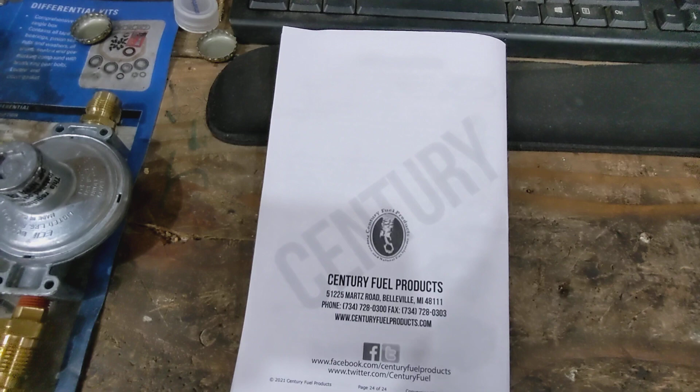Today I'm finally getting around to putting this propane conversion on my Coleman. Is it a Coleman? I don't know what it is. It's a generator, 5,000 watt. I'm tired of running gas. Out here in Western Washington, we lose power quite frequently, and gas is just something that's unreliable. You know, you can't store it like you can propane. You got to put additives in it. It loses its volatility. Propane sits in a bottle and there it lives.

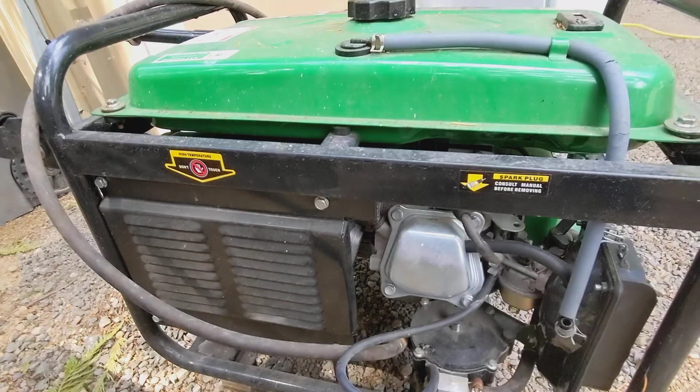So there's a couple different variations of this. Like this one, for example, I've been using this for a couple years to run various things in the house, refrigerator, stuff like that when the power's out. Now this is one of these hybrid elite 4,850 watts. Yeah, that's total bull. It's just not capable of producing that much power, and in all reality, it can barely even run two refrigerators at the same time.

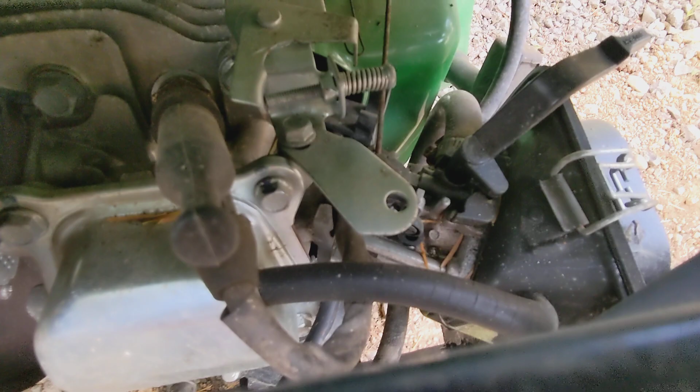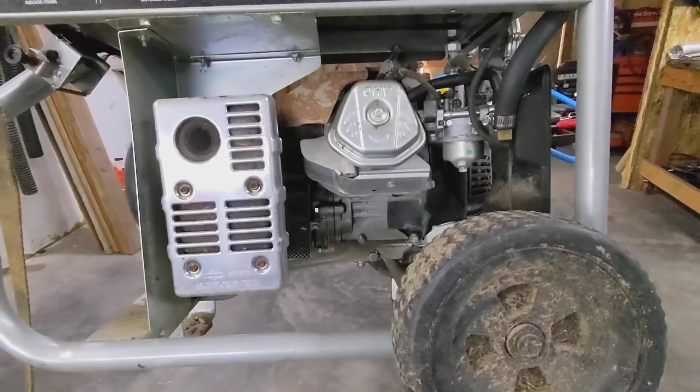So these have a regulator. These ones are sensitive to vacuum, so it's kind of like a vacuum secondary on a carburetor, where the more it sucks in, the more it deals with this diaphragm. The one we're going to install is a little bit different. Now, this carburetor is special. It's for this type of application. It's not for a conversion. If we look down in here, you can see that the propane line comes in the side of the carb, and this also has a fuel line that goes in somewhere in there. So this carburetor is specifically designed to run propane or gas. These carburetors are specifically designed to run gas. They don't have the ability to run propane.

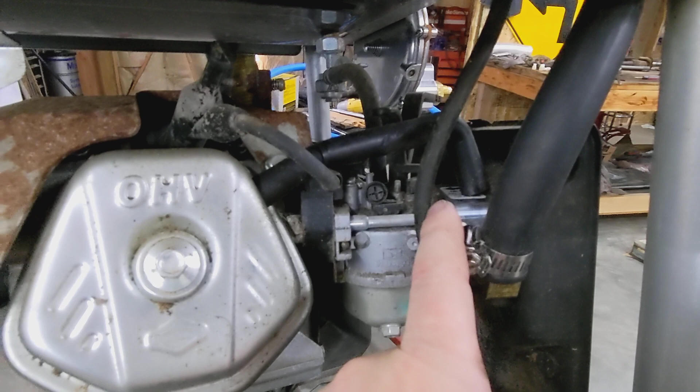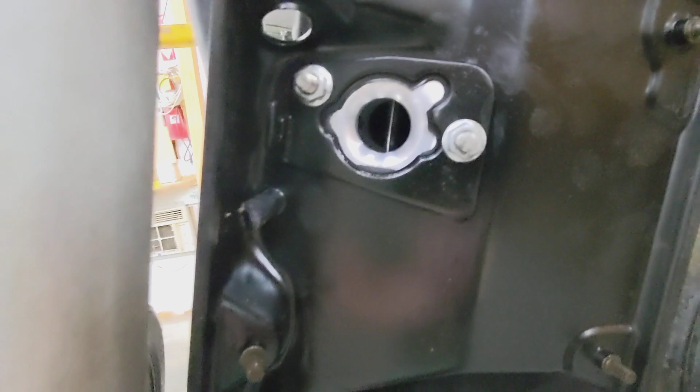So in the conversion, you get this little venturi block that sits on here. It's really straightforward. You don't need me to explain or show you how to do it. Take the air filter off, put the extenders on, put the adapter on, and then figure out which way you want your hose to go. That's it. You put it back together. So this has a secondary venturi. Now, carburetors already have a venturi in there, and if we look inside there, we can see our choke flapper.

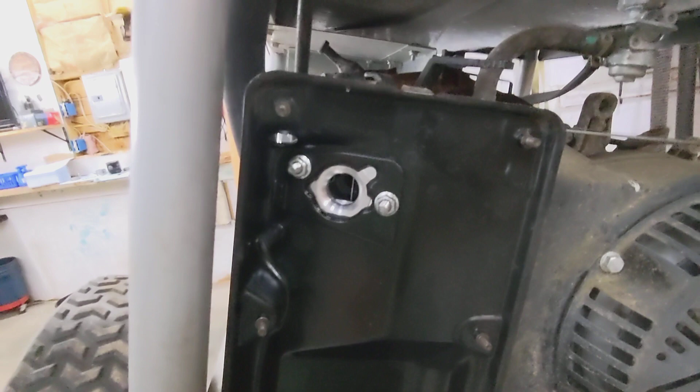So gas and propane have different volatilities, different energy densities, and stuff like that. You'll get a lot of people who will convert their generators like this, and then they'll complain that they don't run right. And that is because the venturi for the gas and the secondary venturi create a low pressure spot that sucks the fuel in. This secondary venturi is smaller, so it creates a low pressure zone in front of the carburetor, so it doesn't suck in the fuel and it doesn't run right. So if you did one of these conversions and it doesn't run right, that's why.

You can't run back and forth. You have to take the adapter off if you want to switch back to gas. That's just how it is. Sorry if you experienced that. You should have done more research to begin with, but that's just how it is. These are not dual fuel carburetors. So with that being said, we have our block here. We have our fuel line, which then comes up to the regulator.

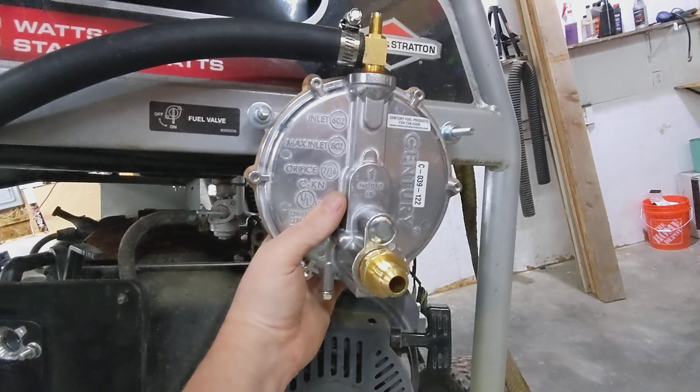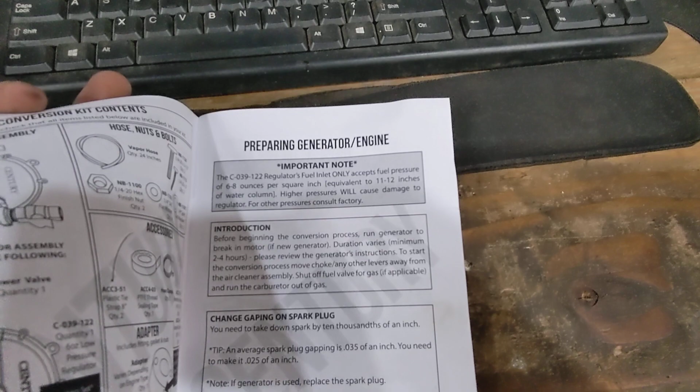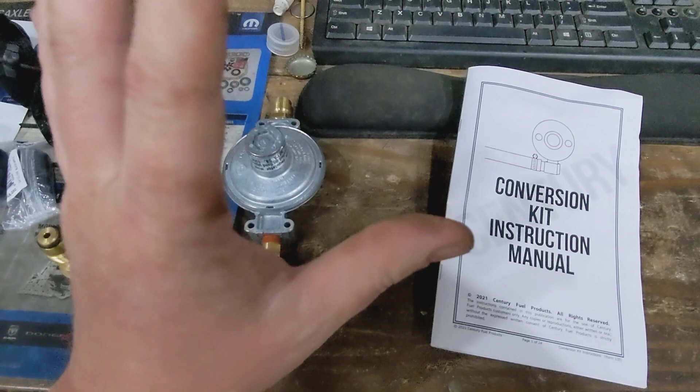Now, in some situations, if you're just running a barbecue tank, you can sort of get away with that. But these systems are extremely low pressure, so it can actually damage that regulator diaphragm if the input pressure is too high. So you always want to run a standardized regulator off of your tank, because it's only a couple of dollars more, and you might as well do it for longevity. There's nothing worse than being 10 degrees out, 3 feet of snow on the ground, and you blew out your regulator because you're cheap.

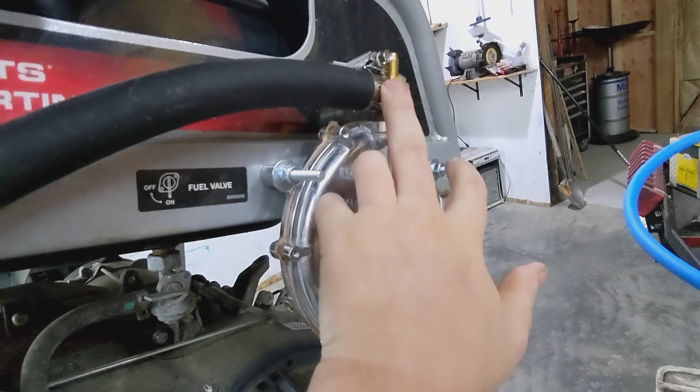So how this works is your propane comes in here, goes through the diaphragm, and then out here. There's also a bleeder on the back. The first time you turn the gas on, you want to hit this bleeder to allow some fuel to travel down the hose into the carburetor. Now this up here is what they call a power valve. It's essentially a needle and a seat, sort of like a carburetor used to have, where this sets the amount of fuel that comes out.

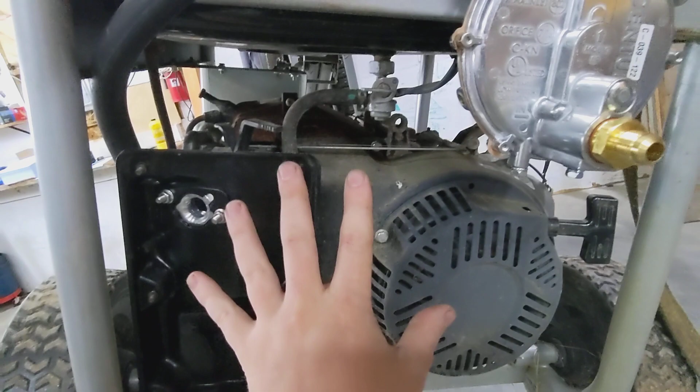See, these are a fixed output. Since your generator has a governor in it that controls the throttle, it wants to run at a constant RPM. It doesn't vary. So this fuel output is constant. This is something that you'll have to adjust later. They kind of come preset from the factory to get the thing running. But you loosen up this screw, turn it in till it wants to die, back it out till it wants to die, and then find a happy medium. More on the leaner side would probably be more economical fuel-wise, but it's pretty simple.

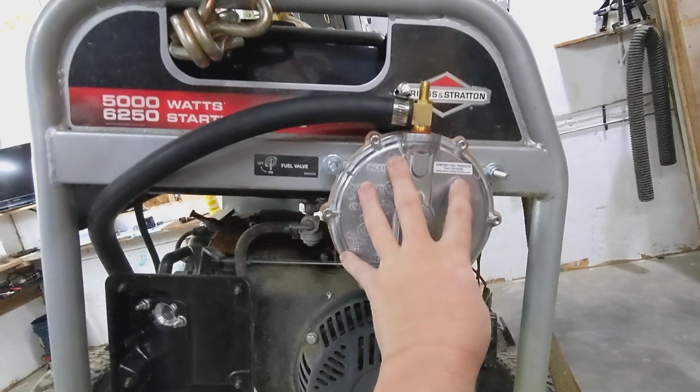So you basically just drill some holes in it, mount it up, and now it's part of the deal. Now I put mine right here just because of the way that my generator setup is. It's kind of hard to get in there.

What are you doing, Willow?

So the kit comes with pretty much everything you need and a couple extra pieces depending on how you want to get your system set up. It comes with a straight fitting and a 90 here. It also comes with some fittings and a 90 here and a shutoff valve. So that all depends on your specific application where you want to put your stuff.

What is that birdie doing over there? He's trying to take an air bath. This is why I can't ever get anything done in the shop.

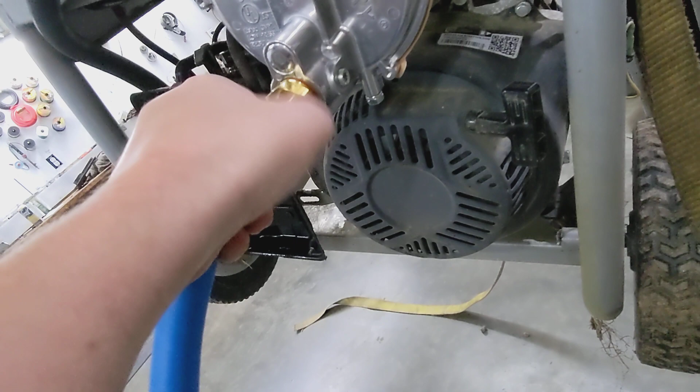All right, so once you get all this set up, it comes with a fuel hose. This fuel hose connects from here. And let's see if we can drop it on the ground. Pretty simple. Just screw it on. Okay, now this end is going to go to the first stage regulator.

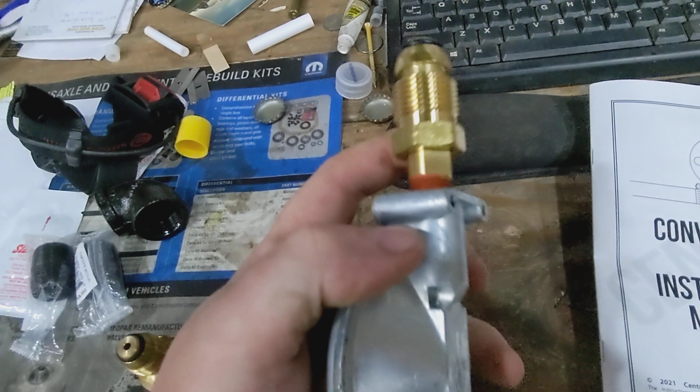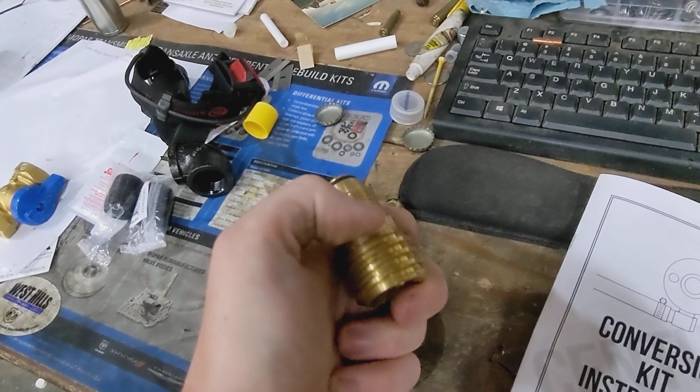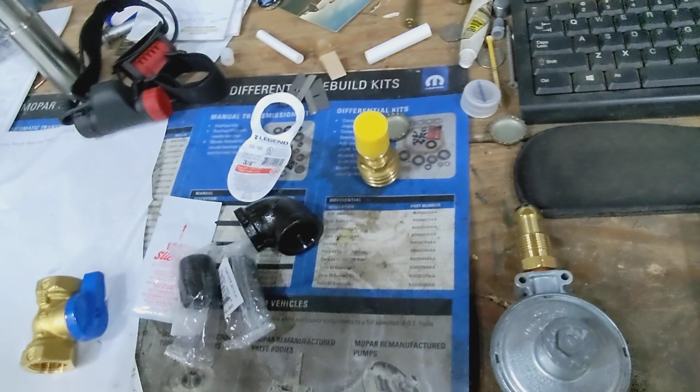Now this has a POL fitting for it. This is standard for all propane tanks. You know, even your barbecue cylinders will have a fitting like this on it, but it's this on the inside. So this is an adapter that I had laying around for other stuff. Actually, this one may have come in the kit. I'm not sure. I got a couple of these. It also comes with a shutoff valve, which I'm not actually going to use. So here's some extra pieces it comes with, depending on your application.

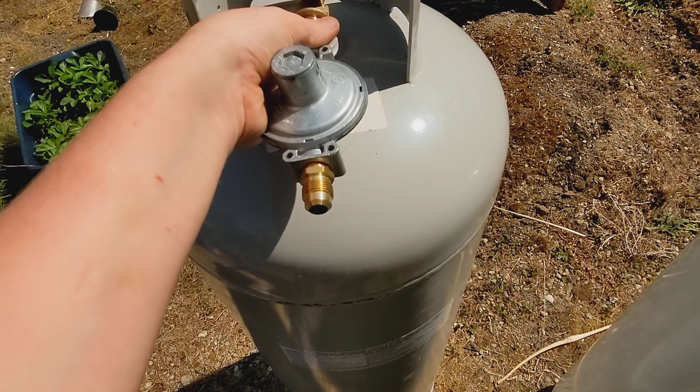So this just basically screws into your tank. I've got 3 of these tanks here. Well, obviously there's 2, but there's 3. So this takes out any major pressure spikes and makes sure that your low pressure diaphragm doesn't burn up. So I actually have some fittings and hosiery that ties all of these tanks together. This is going to last a lot longer than some barbecue cylinders are, but that's pretty much it. I'm not going to show the tuning of this.

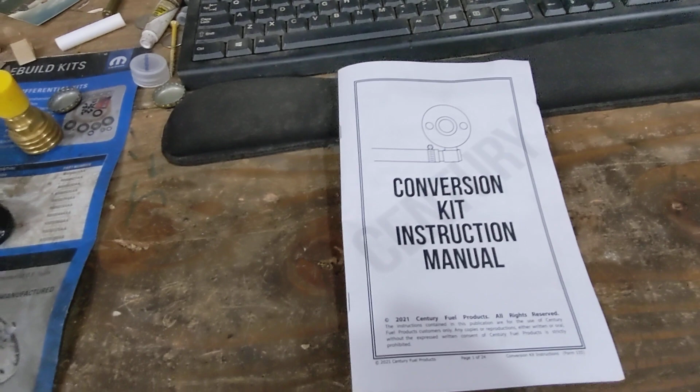That's something you're going to have to figure out on your own, but yeah, propane, much better than gas in a lot of ways. But propane does have drawbacks. There are certain things that you need to be aware of. First, energy density. Propane does not have as much energy density as gas. That should be something that should be pretty obvious. Gasoline has more energy per quantity than propane does. So you're going to lose power out of your generator. I think it's like 15 or 20% right off the bat because it doesn't have the right energy density.

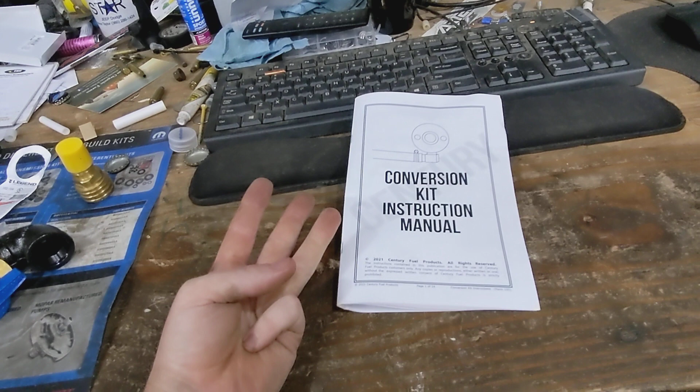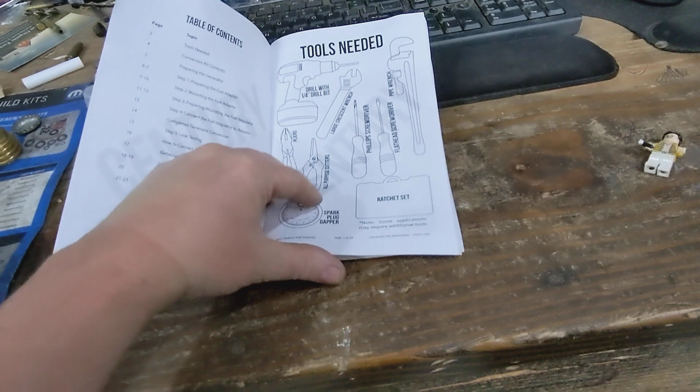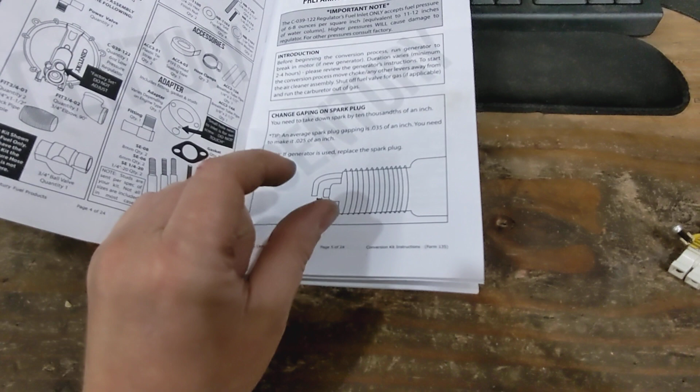But propane's storable. It doesn't need additives put in it. It doesn't lose its volatility. It won't blow up in your shed because of pressure, and it's much safer. It's easier to store, all sorts of things. So one thing you do need to be aware of is, since the energy density is different, you do need to change the gap of your spark plug. The closer together the spark plug gap is, the less energy it requires to jump that gap.

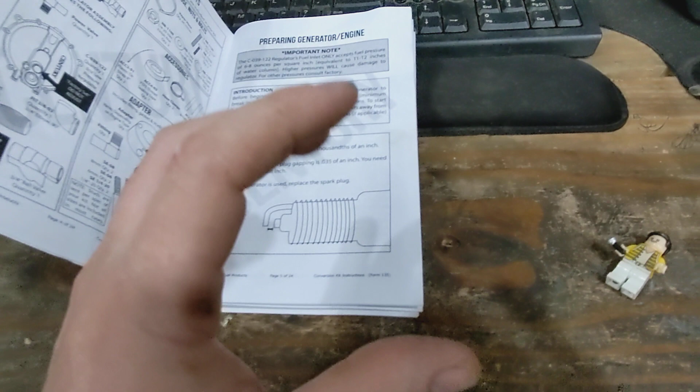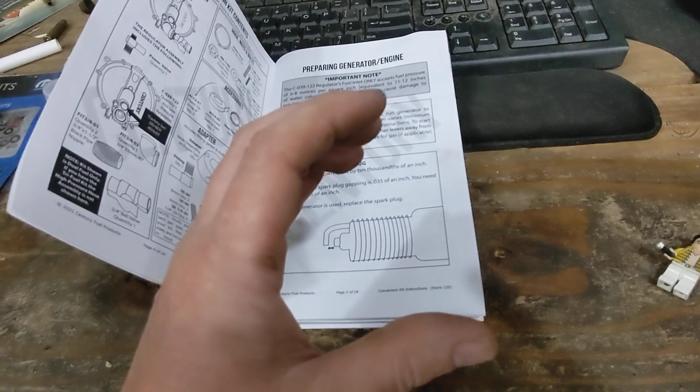Since you need more fuel, more propane density, volumetrically to equal the same amount of gas, you need to shorten up the gap, because basically, to make a really long story short, compression and density of fuel has an ability to put the flame out. So the bigger your gap, the denser the fuel, the harder it is to jump that gap. And you can actually have enough fuel in there where it won't jump the gap at all.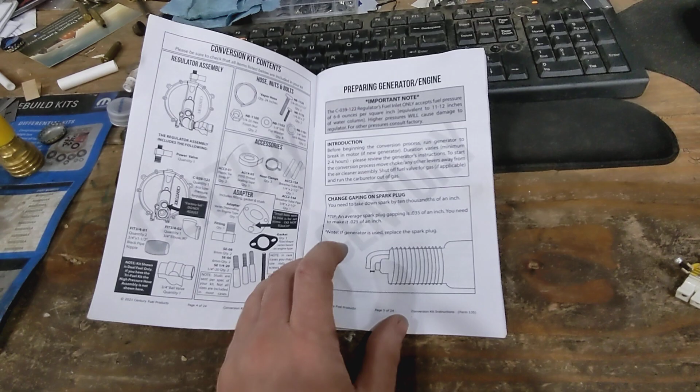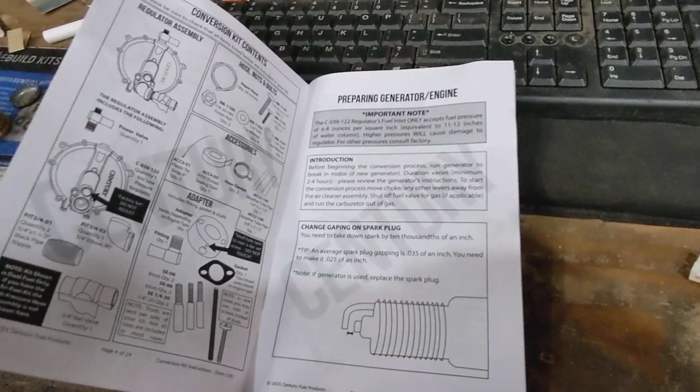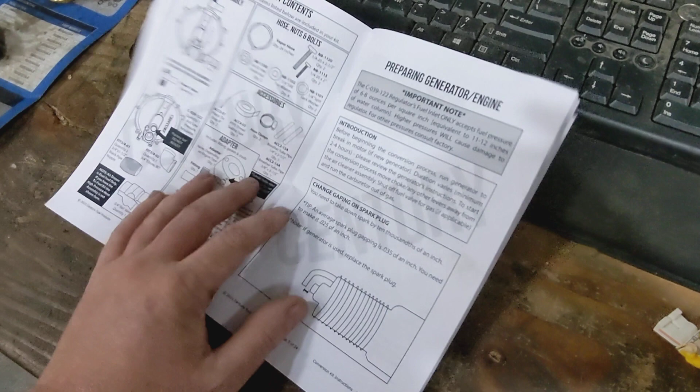That's why if you ever worked on turbo cars or high performance vehicles, they will open up the gap and put in a much larger winding coil, because you want beaucoup juice coming out of here. Now, your typical old carbureted, can coil style vehicle from back in the day, that's like 15,000 volts. That's nothing. Your typical modern vehicle, they're running 50 to 60, up to 75,000 volts, 75 kilovolts. So that's much more power coming out of the plug.

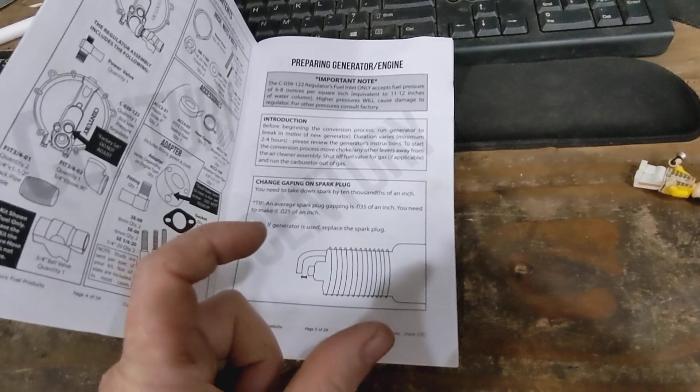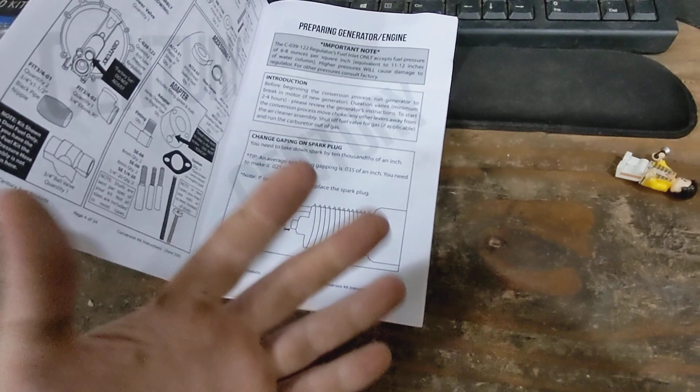And since these don't have coils, they use magnetos and fluxes and inductors and all that sort of stuff. It doesn't have the ability to just magically make more power. So you have to close the gap up in order to make this work. So with all of that being said, this is pretty easy, and I hope that this helps somebody.

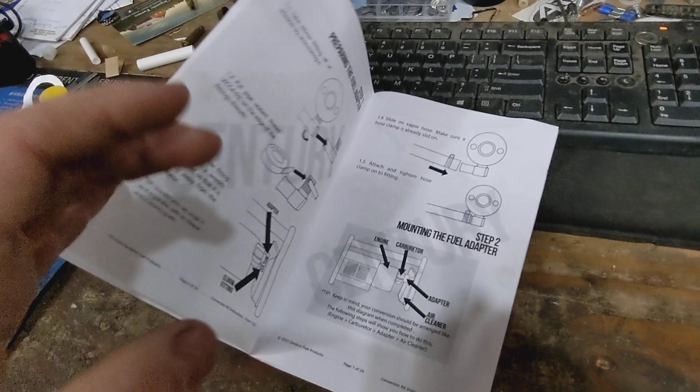Although there's probably going to be somebody that's going to complain, because they always do.